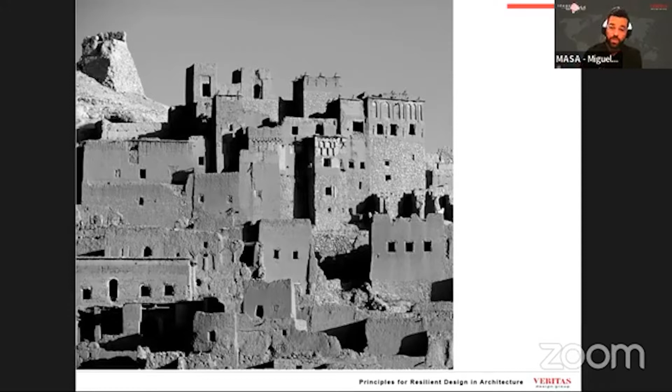This means that architecture has always responded to the environment and to the context or conditions of a certain place. Locally in Malaysia, the longhouse, or in Indonesia, the Batak house, are examples of how architecture has traditionally adapted to the specific environmental conditions or demands of a place and the available technology to generate its own constructive systems and typologies. This means architecture has always, not only recently, tried to respond to the environmental and contextual conditions of a particular place.

Likewise, at Veritas, we did not start doing sustainable or resilient design in our buildings only recently, or only a few years ago, when these keywords became popular or usual in the industry or society. Indeed, the preservation or restoration of the environment through what we do, through the buildings that we do, has been a core part of our business and our practice since Veritas started in 1987.

And I will show you today, or prove to you today, how environment is actually one of the key core values of the 5 Veritas core values.

In 2004, we created our Veritas Fund for Excellence, through which we dedicate a certain portion of our annual profit to initiatives that further innovation, design excellence, and social responsibility towards the built environment.

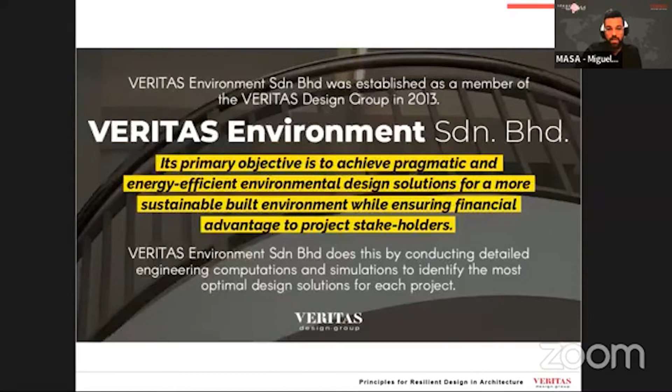More recently, after having done more than 35 certified green buildings worldwide, we understood we were ready to launch our own green assessment tool, our Veritas Green Check, that allows us from very early stages in the design to understand how our buildings can respond better to environmental demands and how they can be sustainable, and also to help our clients focus on the areas that are key when they want to apply to any of the conventional green rating certificates or tools in the industry.

By the way, we are in the process of getting our Veritas Green Check endorsed, so hopefully soon this will be one of the usual industry tools to certify our green buildings in the country.

Two years ago, when the current health concern started — I will not mention those words throughout my entire talk, I have banned myself from saying those — we understood it was important to go beyond sustainability towards a more complex concept that talks about our preparedness, our buildings and our cities, societies, and people, to face another set of challenges or crises and to bounce back, to recover quickly and to resist.

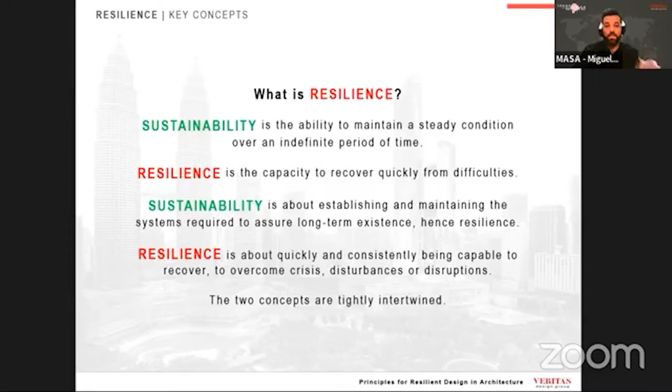So sustainability is about establishing and maintaining the systems required to assure long-term sustainability or existence, while resilience is about quickly and consistently being capable to recover, to overcome crises, disturbances, or disruptions.

So what does resilience entail when it comes to building design? To design a building with resilience means to start the design process by assuming the natural or man-caused situations that may distress the normal use and operation of a building, by challenging its integrity, or by endangering or causing disruption or disturbances to its occupants. So resilient design is always local or locally specific, as the environment plays a critical role in determining the factors that make a building resilient or not.

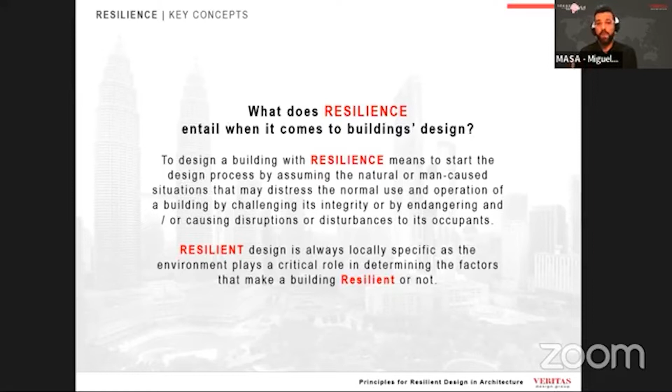We have studied the aspects that help us determine whether a building is resilient or not, or to what degree a building may be considered resilient. And we have categorized those notions into 7 principles for resilient design in architecture.

Redundancy, which is the integration of duplicative systems and structures. Adaptability and flexibility, which is the ability to respond to the local context and to accommodate changes to environmental and social conditions and needs.

Interdependency, which is the ability to offer a holistic approach to not only the building, but the site, the city, and the community. Regenerative and restorative, that talks about the incorporation of systems that reduce the demand on fossil energy sources and infrastructure systems while reducing the carbon footprint of the building.

Durability, which is the ability to offer long-lasting, long-term value to our buildings. Value, the capacity to provide social, environmental, and economic benefits to the surrounding community. Cultural responsiveness, the ability to reflect the local culture and to create long-lasting memories for the community.

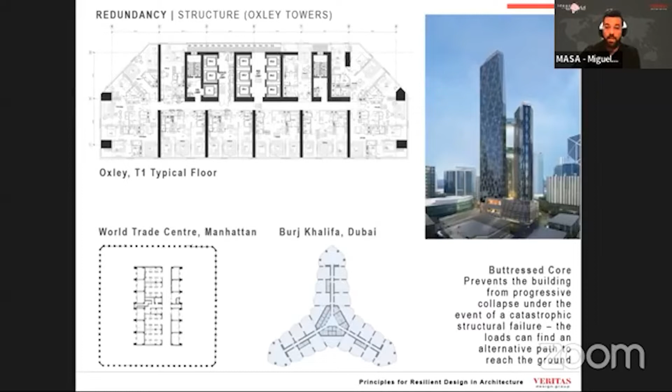The buttressed core was used in the Burj Khalifa in Dubai, which you can see as well in the slide. It's the tallest building in the world, but also in our Oxley Towers, a 345 meter height super tall building in KLCC.

There are also mechanical and electrical systems that can be rethought, reconfigured, or just relocated to make our buildings more resilient, to improve our buildings' readiness to face challenges and to bounce back after a crisis. Some of these systems are present as well in our Oxley Towers project.

For example, there are backup transformers. This means that all components have transformers that can take over in case of malfunction of the main transformer. All the essential distribution boards are backed up by diesel gensets. All the chillers and pump sets are also backed up by additional standby pump sets. All these backup generators and pumps, usually located at the basement, what renders them unusable in case of flood, may be relocated to the podium.

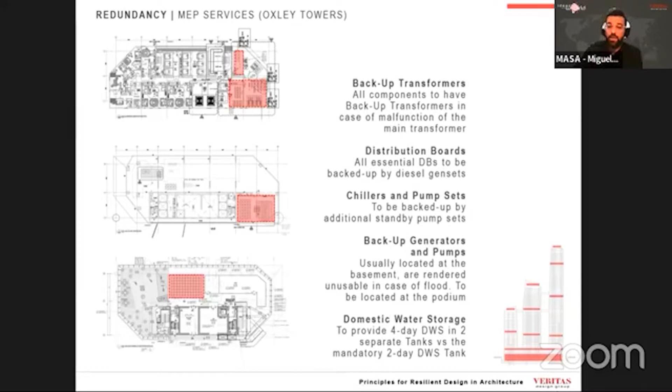The domestic water storage tanks, instead of providing the usual 2-day water storage, may be provided for 4 days in 2 separate tanks. So in case that one is rendered unusable due to maintenance or the water is corrupted for any reason, we can still rely on another one to ensure that there is no water disruption.

Also, redundancy in the security systems can contribute to making our buildings more resilient and ready to face any security threat or breach. We talk about fire control centers and security control rooms distributed throughout the building, but also about other security features or devices that can be incorporated throughout the building to prevent different security hazards, such as boom gates or vehicle scanners, access cards, CCTV, turnstiles.

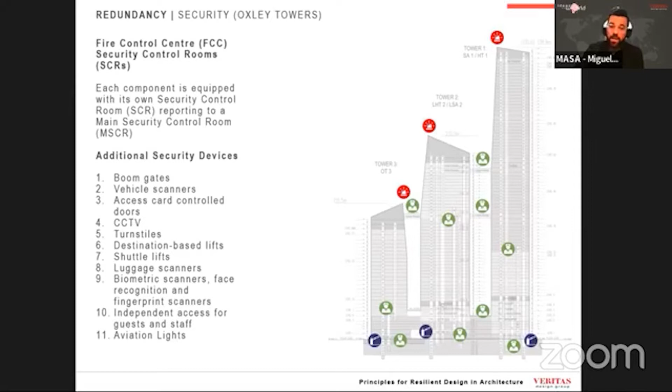But you may consider as well other features commonly used, like destination-based lifts or shuttle lifts that force visitors to pass by 2 tiers of security, 2 levels of lobby, as measures that enhance the security in our public buildings, especially those of very large scale. Luggage scanners, biometric scanners, and even independent accesses for staff and for visitors with different sets of security measures are considered as redundancy in the security features of a building.

As well, when we talk about tall or very tall buildings, in this case we refer to buildings that must fight the fire internally. This means that these tall buildings require, in general, far more robust considerations of both its passive and active firefighting strategies.

Some of the easier or more immediate design passive considerations that we can impose on our tall buildings to make them more resilient are the provision of wider staircases that overcome the counterflow and congestion due to slow evacuation and fatigue, and the use of performance-based fire engineering.

For critical areas such as atriums or large public spaces at high floors, sky decks, sky restaurants, etc., the performance of the fire, the smoke, or the people must be simulated to anticipate and design better our buildings to behave in case of fire.

The use of class 0, non-flammable, and class A1, non-combustible, fire-resistant materials to limit the fire load in our buildings, and of course the regular maintenance and testing of the fire protection systems.

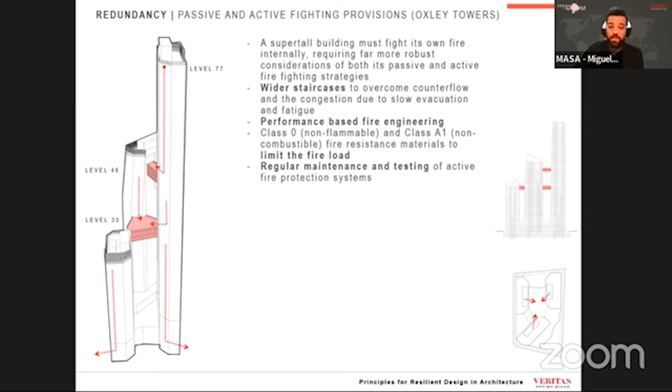Talking still about fire evacuation or fire safety in buildings, especially again in tall or very tall buildings, we must consider as well, or anticipate throughout the design process, how the evacuation of our buildings will be.

In general, there are 3 evacuation strategies. Total evacuation is the traditional strategy—everybody gets out from the building—but this may be impractical for tall buildings or for very tall buildings.

As the simulations show, it takes more than 3 hours to fully evacuate a very tall or super tall building due to the high occupancy, people getting fatigued or tired, or people with disabilities who may block the staircases, and of course the counterflow of the firemen going up.

In these cases, when total evacuation is not possible, we should consider a phased evacuation. This means there is a zoned alarm and public address system that allows a phased evacuation of certain components, those that are in danger.

We can also, as we do in our project in Oxley, use sky bridges to cross from one tower that may be on fire to the adjacent tower, so people can use the normal lifts to evacuate the building through the adjacent tower, or use refuge floors where occupants can safely wait until being rescued.

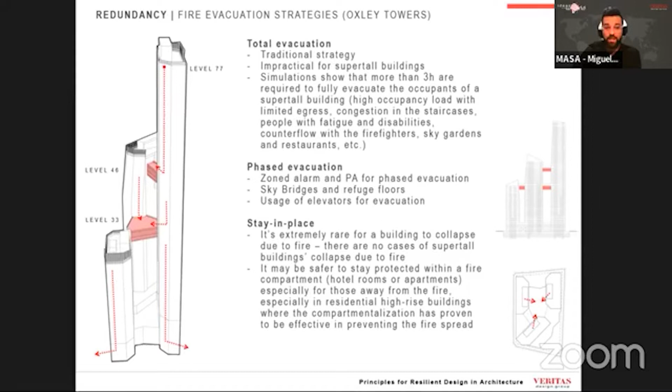Adaptability and flexibility is the second of these resilient design principles, and talks about the building's ability to respond to the local context and to accommodate changing environmental and social conditions and needs. It also talks about the ability of a building to be retrofitted or repurposed in the future.

There are two factors related to the floor plate design that are key. First, efficiency: ensuring the floor plate has a certain size that assures a commercially viable efficiency, ideally around 80% of the floor plate. Second, the depth of the floor plate should be such that daylight can penetrate to the bottom of the floor plate.

On the screen are a couple of examples of buildings by us, VERITAS: Menara Prestige, an office building in KLCC, and also our Oxley Towers, a mixed development in KLCC.

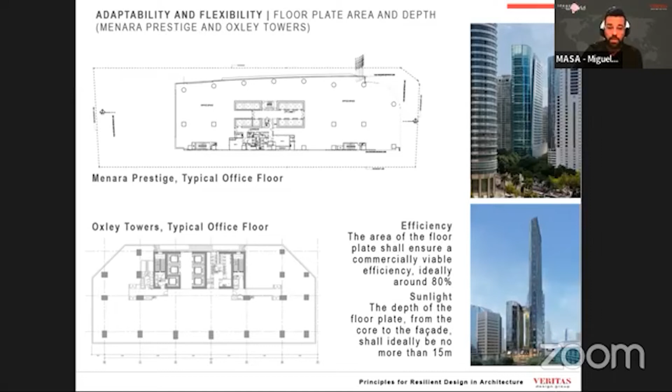Talking about the ability of a building to be retrofitted, the choice of structural systems is also key. This slide summarizes the two main systems commonly used for RC structures: PT, post-tension slab and beams, or conventional RC reinforced concrete structures. While PT post-tension is very popular, as it can be lighter, faster, and cheaper than conventional RC slabs, especially for large-scale repetitive buildings, PT slabs are less flexible in the future if large or multiple openings for services need to be added to the floor plate.

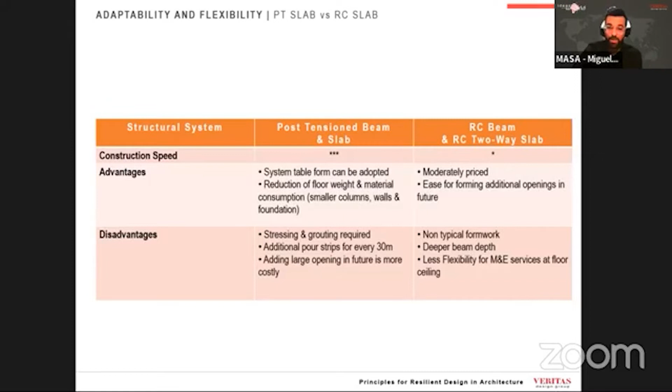For example, if we were to repurpose an office building into a hotel or apartments. As the talk will be available on YouTube, you can refer later to this table in more detail. But I'll give an example using our Oxley Towers. Tower 1 has residences and hotel guest rooms, and Tower 3 has offices. Both floor plates have a similar size and geometry.

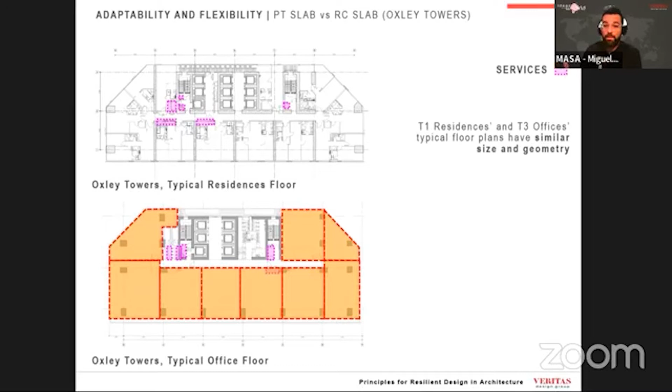The provision of RC versus PT slab for Tower 3, and columns instead of shear walls, despite the initial higher cost and perhaps slightly longer construction time, may offer the possibility to easily retrofit the building in the future if there was no demand for office space. Likewise, the provision of RC slab versus PT slab at podium car park floors may offer the possibility to retrofit the car park floors in the future when the public transport network and usage has improved, and cars become less relevant or less present in the city.

Another way of making our buildings resilient by making them more adaptable and flexible is the incorporation of aircon farms, where individual compressors in individual aircon ledges can be grouped together in a common area. This approach has several advantages.

You can see the aircon farm in blue in the slide. First, the grouped compressors are placed facing the less favorable views, minimizing noise to habitable areas, and grouping them allows us to create a sleeker, cleaner facade expression, especially when we use curtain wall. It also offers easier maintenance from common areas rather than accessing each individual unit.

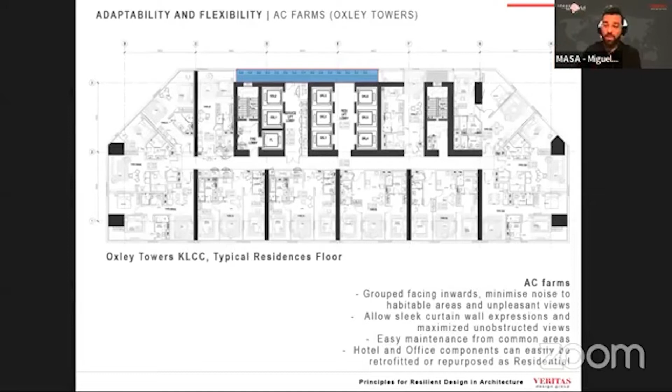But very importantly, when we have this facility, hotel and office blocks can very easily be retrofitted or repurposed as residential use when there is no demand for hotels or office space. This is another example of use of aircon farms.

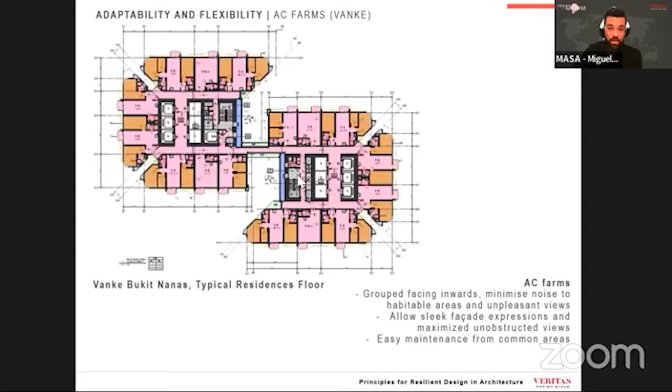This is our Vanke Towers in Bukit Nanas. You can see the aircon farms in blue at the center of the building.

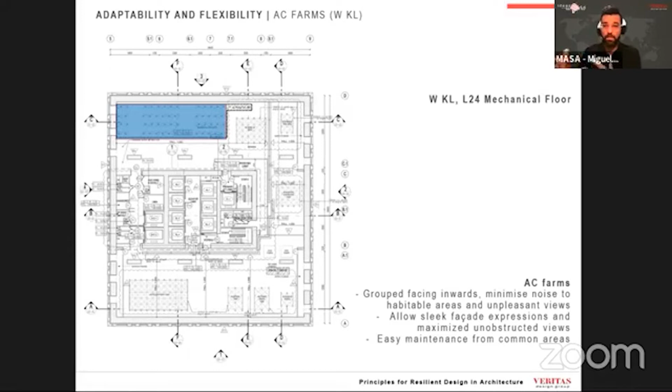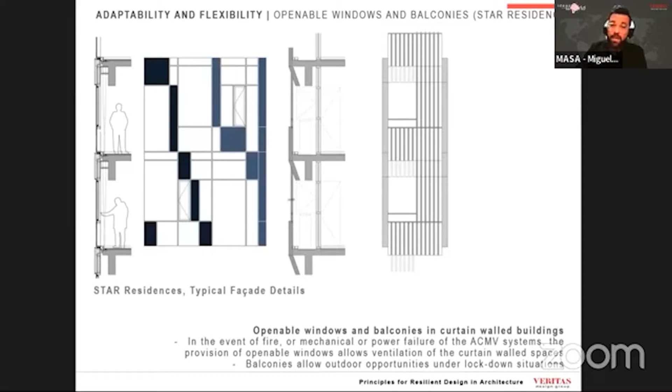But also, we have discovered and experienced ourselves through the last two years that balconies and outdoor opportunities under lockdown situations are critical, and this is unusual to be provided in tall buildings with curtain wall. So Star Residences is an example of how this can be integrated into the facade design successfully, as you can see in these images.

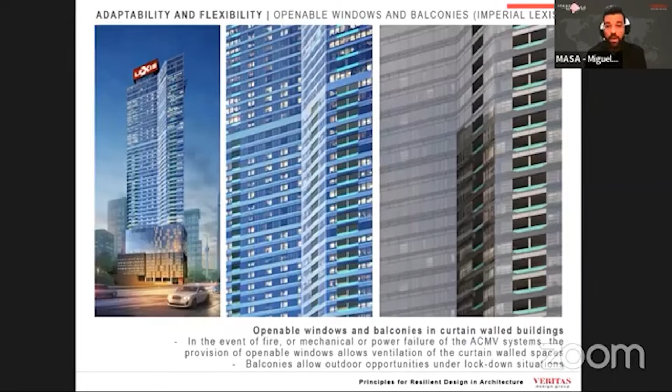Imperial Lexis, also in KLCC, is another example of how windows, aircon ledges, and outdoor spaces can be provided in a curtain wall building without disrupting its sleek expression. In this case, every residential unit is provided with a small private swimming pool and an outdoor deck. Here you can see some visuals of how this building will look by this year or early next year when it's completed.

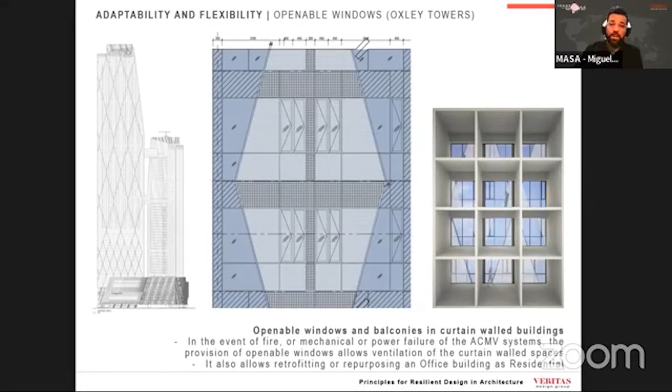And a last example, Oxley Towers, again, of how we can incorporate openable windows in a curtain wall building as part of the facade pattern, as part of the facade composition.

Interdependency, which is the third principle for resilient design in architecture, talks about how buildings can offer a holistic approach, not only to the site, but to the city and to the community.

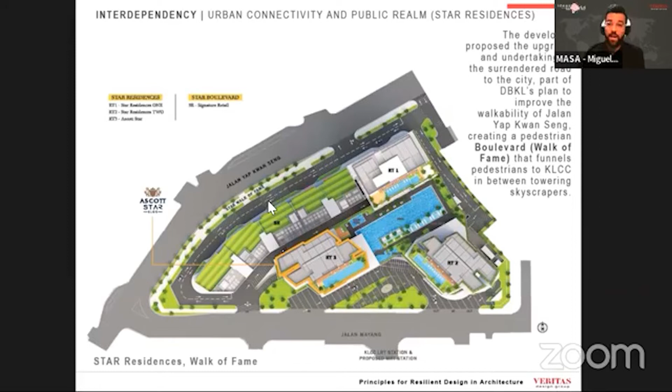In Star Residences, the developer was generous enough to propose the upgrade and the undertaking of the land surrendered to DBKL, as part of DBKL's plan to improve the walkability of Jalan Yap Kwan Seng. We took this opportunity to create a pedestrian boulevard along the northwest edge of the building, along the retail podium, that funnels pedestrians to KLCC, and we call it Walk of Fame. The boulevard along the retail podium sets a precedent for future interventions along the street, which will eventually, once the entire street front has been completed, create a continuous pedestrian pathway, and certainly will improve the walkability of this part of the city.

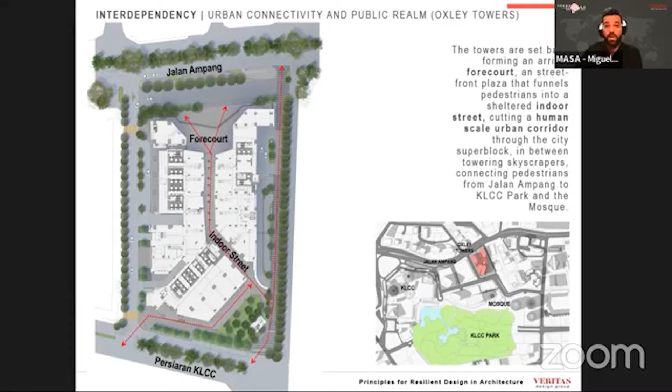Oxley Towers is another example of how our buildings can contribute to creating more resilient cities by improving walkability. In this case, the towers are set back, forming an arrival forecourt or plaza that funnels pedestrians through an indoor sheltered street, cutting an urban corridor through the city superblock and connecting pedestrians from Jalan Ampang to KLCC and the mosque. The arrival plaza before the retail facing Jalan Ampang will eventually, once the entire street front has been completed, create a continuous pathway and will also improve walkability along Jalan Ampang. Through this indoor street, this urban corridor, we allow pedestrians to walk under shelter from Jalan Ampang to the pocket park at the rear of the building and to KLCC and the mosque.

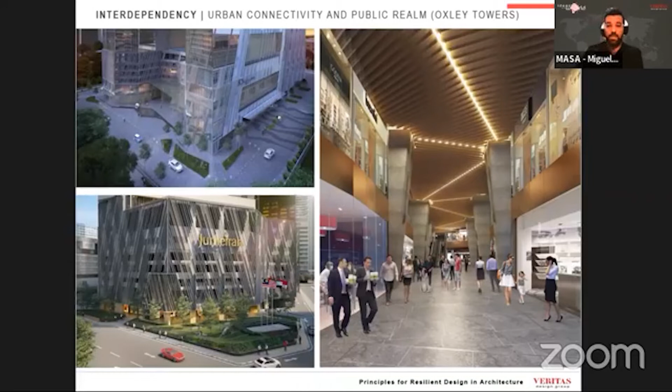On another hand, mixed-use developments are by default resilient. I'll explain why. For example, in Oxley, there are different uses or functions of components: residences, offices, hotels, and retail. All of these uses are independent, but can also support and reinforce each other, creating a city within a city. This reduces the need for commuting and the associated transport pollution, or the time we spend doing so, but also allows us to centralize and streamline the security of the building.

On another hand, it allows us to design buildings and systems which are alive 24/7, versus the regular daily use cycles of single-use buildings that are empty or non-operational at certain times of the day. In this case, the mechanical and electrical services of the building can be designed and streamlined to serve the different needs of the building when certain components are operating concurrently or at alternate times.

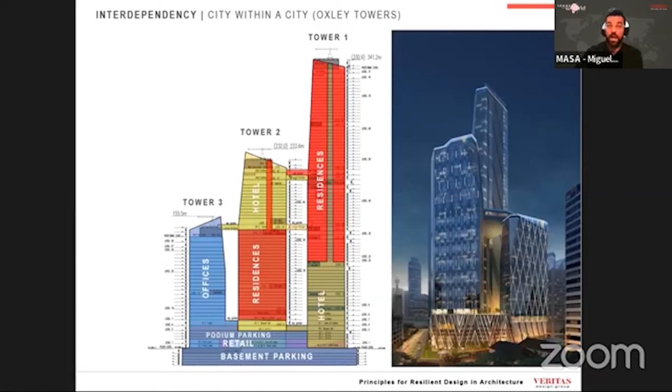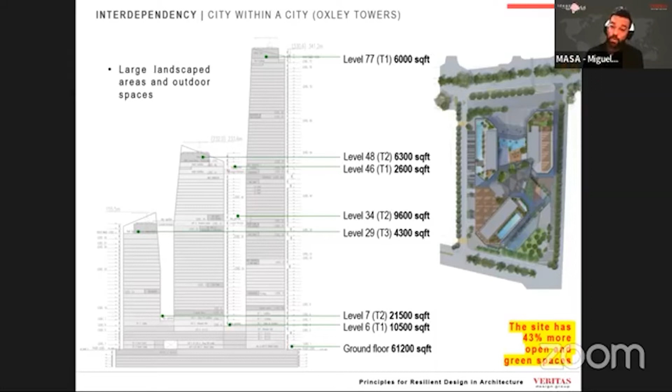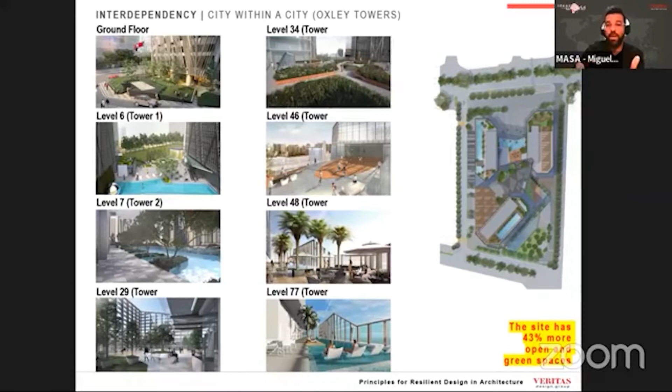Within the building as well, the large provision of landscaped areas and outdoor spaces, not only at the ground floor, but at the podium, sky decks, and sky bridges, provides building occupants with multiple outdoor opportunities within the compound itself. Indeed, considering the building's footprint, there will be 43% more green areas once the building is completed than before.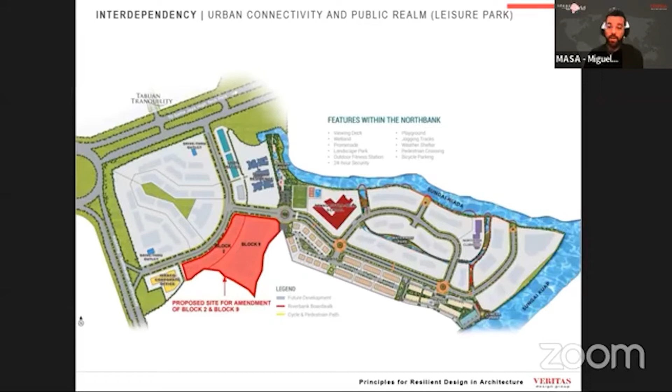This is another example of a complex, large-scale mixed development for one of our clients. We were commissioned in 2019 to develop the site marked in red as a business and leisure park, as a mixed-use development. In our proposal, there is a long spine block that accommodates most of the residential units, together with a shorter residential block that you can see at the rear.

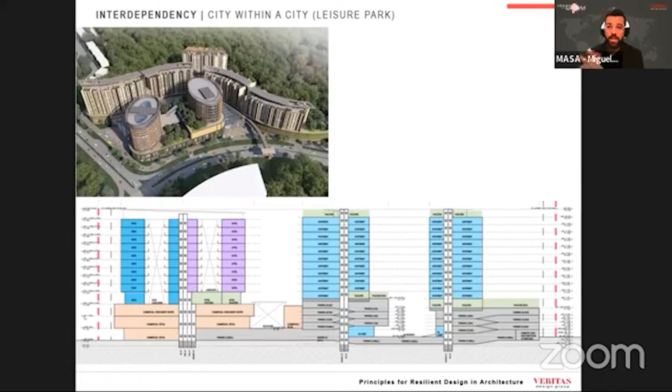And at the front, there is a 3-story retail mall with two elliptical blocks sitting on top. The one on the left accommodates a boutique hotel and some SOHO units, and the one in the center is dedicated to offices.

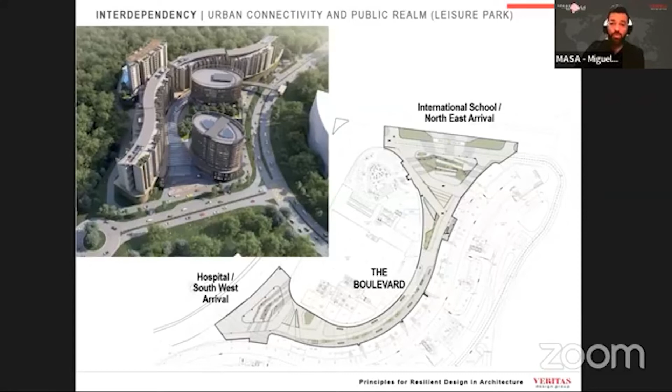But besides the attractive design of this overall park, the most important gesture that our proposal introduces is a sheltered, semi-outdoor boulevard that at the same time creates a large communal recreational space, plenty of trees, water features, canopies, al fresco eateries, not only for the community living or working there, but also for those who visit the building. But more importantly, this boulevard connects two very important nodes in the master plan: the international school at the north and the hospital at the southwest.

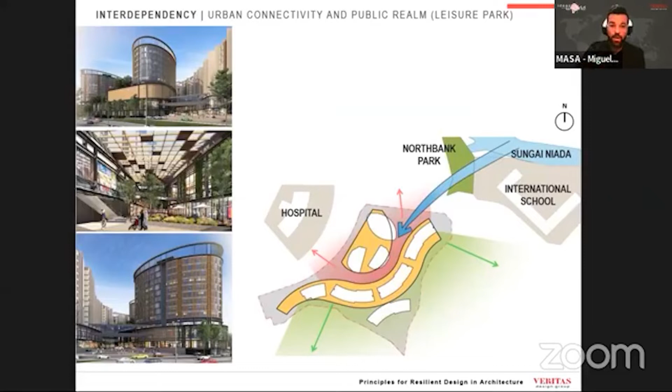Indeed, in 2020, this client invited us to propose another two large areas for this master plan, and we then understood the key role that our first proposal, the business and leisure park, and this boulevard was playing, not only in connecting the hospital and the school, but also in connecting the whole residential district at the east with the entire commercial district on the west, and furthermore with the future, or hopefully future, LRT station passing by to the west.

Through this boulevard, we catalyzed a key role in this master plan that focuses on urban pedestrian connectivity through a pleasant, user-friendly network of green streets, boulevards, and plazas.

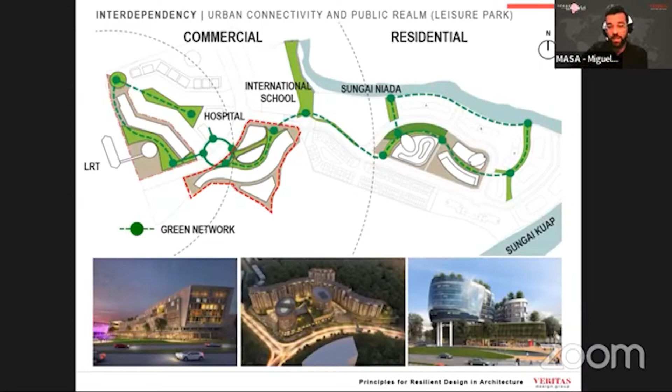The green focus extends to the architectural proposal, and indeed every building and almost every piece of roof is colonized by green, by water, creating plenty of outdoor areas where every member of the community, not only those living or working there, but anyone nearby or anyone who wants to visit this master plan, can find their own space to be alone or to be together.

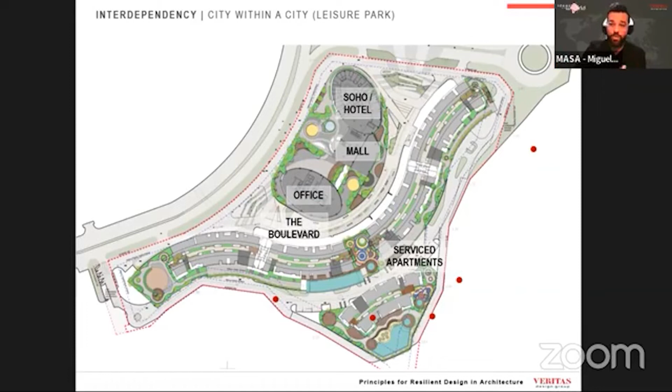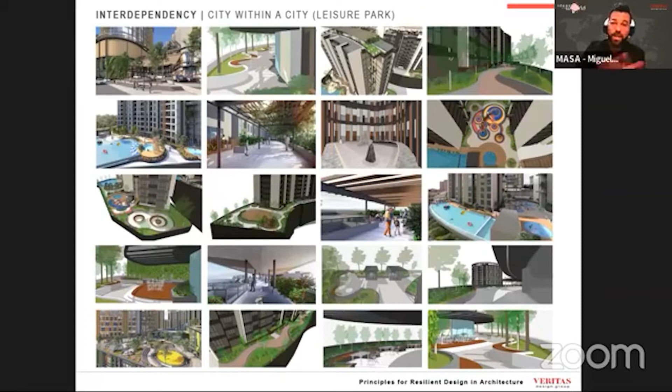And these are some of the landscape areas. Indeed, this building certainly proposes a very extensive program of outdoor and green areas, not only for the community living there, but for the surrounding buildings.

Continuing with some of our buildings offering a very strong responsible urban approach that creates and improves the public realm, we have the Selangor State Development Corporation headquarters, or the PKNS headquarters in Shah Alam.

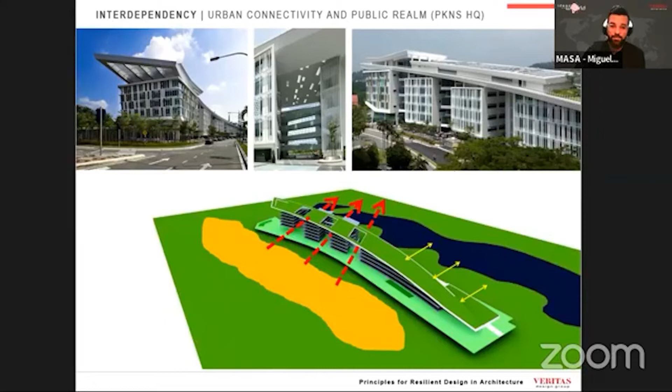As mentioned at the beginning, Veritas has not done sustainable and resilient buildings only recently. Indeed, many of these notions and values are strong and visible in some of our early buildings.

For example, the Ministry of Natural Resources and Environment in Putrajaya. Some of these values and features that are visible and present in these buildings have proven how innovative these buildings were indeed at the time they were proposed.

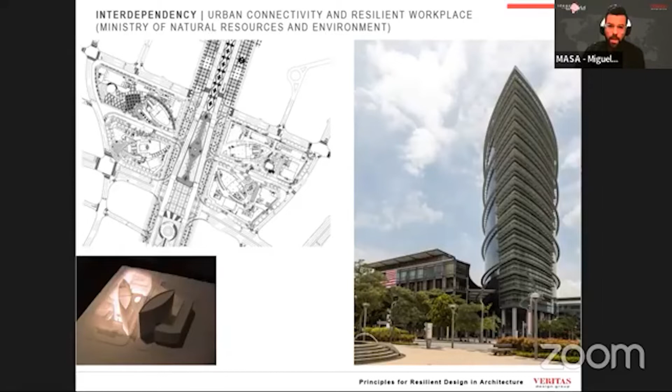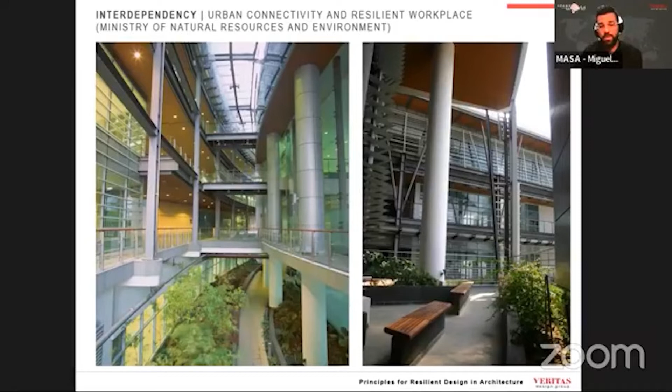At the ground floor, indoor streets allow the public to walk through the buildings, creating a pedestrian-friendly city as part of a larger master plan that we did within the area. And also within the building, sky gardens allow people to be in touch with nature, even at the workplace.

The Digi headquarters is another project that anticipated the importance of sustainable and resilient workplaces. This is a pioneering paperless office in Malaysia, where we carve a large central atrium that shelters the occupants from the outdoors and allows the whole community to come together.

This atrium is a versatile, multi-function space that serves both the daily needs of a gathering place, but also for larger corporate events. At the end of the linear atrium that cuts across the entire building and is surrounded by a hill, we propose this outdoor space around a water body for colleagues and also for social or corporate events.

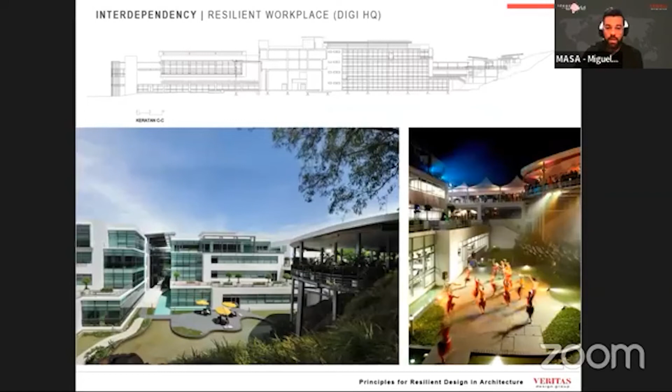More recently, we completed the AirAsia headquarters in KLIA2, in this case with an aesthetic inspired by aviation geometries. Indeed, you feel that you are walking under the belly of a large jumbo jet.

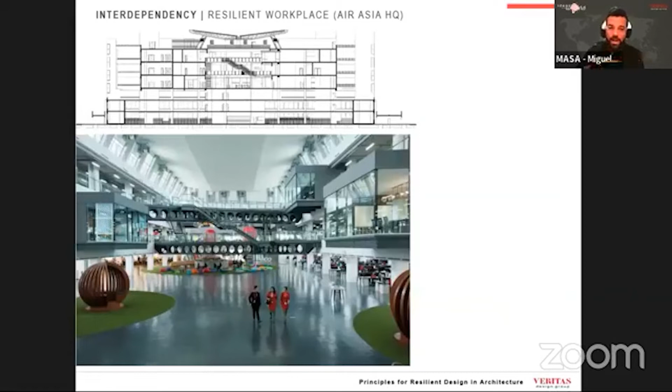We created another large central atrium sheltered from outdoors to allow the entire and very large AirAsia community to come together for their daily activities or for their corporate events.

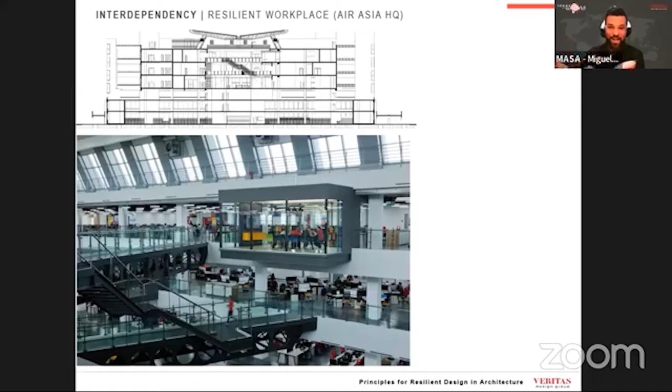Within the atrium, the steel structure appears to give shape to the wings of a plane, and even the air traffic control tower makes an appearance in the atrium in the form of a meeting room.

But also the roof became unexpectedly a social space. And indeed, a year after we completed the building, Tony Fernandes called us to revisit the roof and to make a landscape proposal for it, which you can see in the before and after pictures.

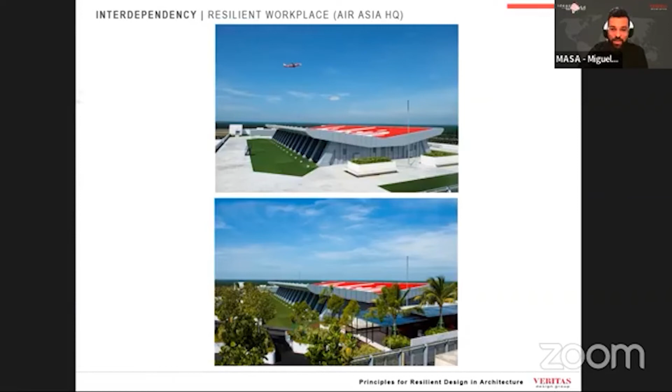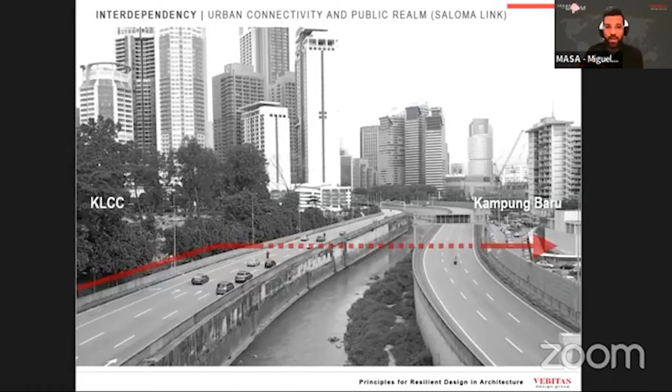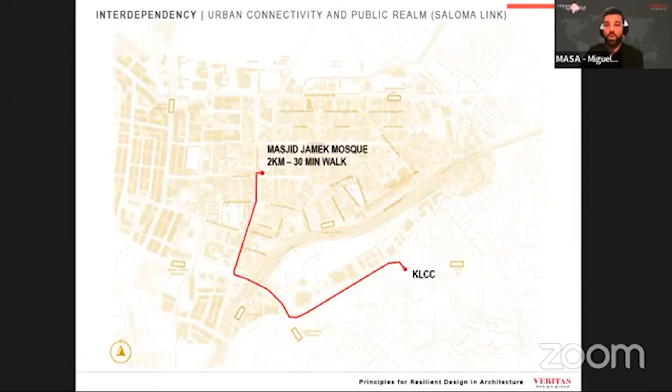This is a picture that keeps striking and inspiring me every time I see it. The Klang River and the 6-lane highway created a physical disconnection between Kampung Baru and KLCC. Despite being adjacent, there was very limited infrastructure providing direct pedestrian access between the two districts. Saloma Link, as a catalyzer for a much larger urban regeneration program, tried to address this by shortening the former 30-minute walk from Masjid Jamek to KLCC to just 15 minutes, or 10 minutes from the Kampung Baru LRT station to KLCC.

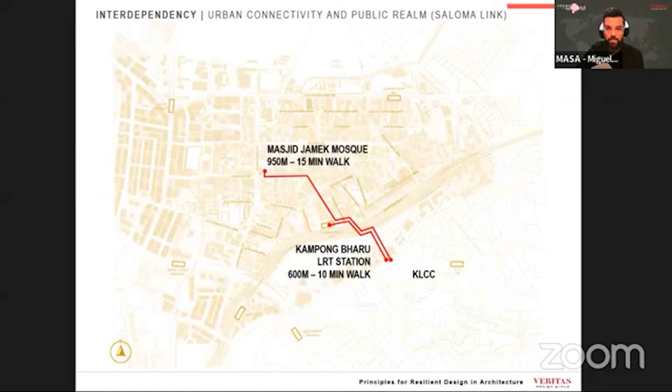The bridge opened up new opportunities for users and encourages more walkability in the city. It also allows local economic activities to flourish and contributes to a vibrant urban setting. More than just a bridge, Saloma Link is part of an effort to encourage pedestrian and cycling mobility and to promote sustainable urban design, with better landscape, street furniture and lighting, envisioning the future development of Kampong Baru.

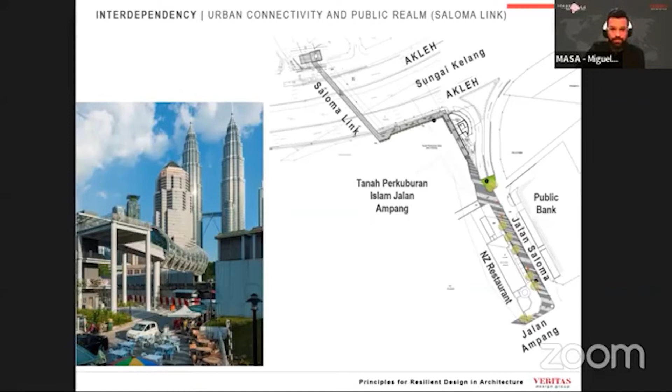The fourth principle for resilient design in architecture is making our buildings restorative and regenerative. This means creating highly engineered buildings that incorporate systems reducing demand on fossil energy and infrastructure while reducing the carbon footprint.

In just a decade, we have completed more than 35 green rated buildings globally, up to platinum level. Indeed, I think we are the Malaysian practice that has done the most green certified projects. I'll show you some of them briefly and explain key achievements and features these buildings incorporate.

We've already spoken about Menara Binjai and its pioneering green certification, pocket gardens and roof garden. Within Menara Binjai we also find the British High Commission, which is the only LEED certified embassy in Malaysia and one of the earliest LEED certified workplaces in the country.

Menara Etica uses only 40% of the energy used by a similar office building and reduces carbon emissions by 55%. So it emits only 45% of the carbon emissions that a normal office building of this size would produce.

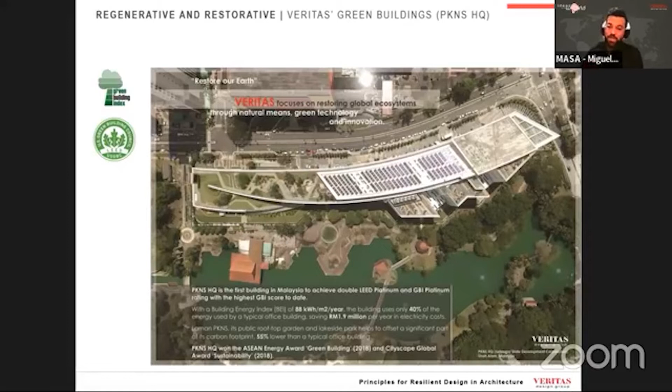PKNS, which we've also spoken about, saves almost 2 million ringgit a year in electricity bills. It uses 40% of the energy used by a typical office building and emits only 45% of the carbon emissions produced by a typical office building of this size.

The International School of Kuala Lumpur, or ISKL, is the lowest carbon footprint educational building ever designed in Malaysia. It's a highly engineered building that uses the latest technology as part of the learning experience for students, subconsciously educating children on responsible use of energy and spaces through their education and daily lives.

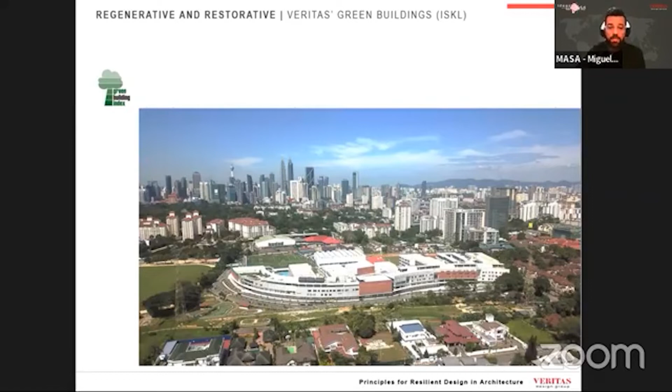ISKL uses only 56% of the energy and 51% of the water used by a similar international school, and saves 2.2 million ringgit a year in electricity bills. It also produces only 56% of the carbon emissions compared to a similar international school.

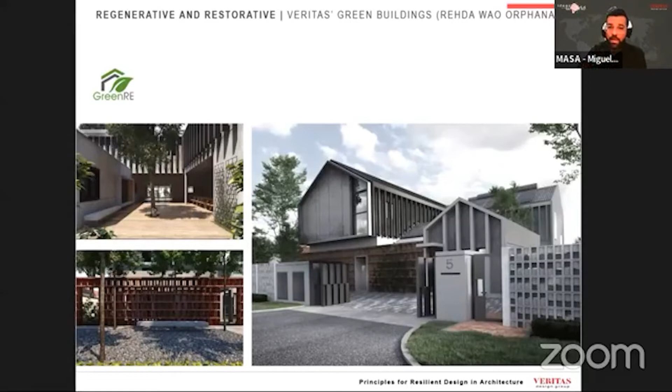Two last projects: the REHDA Women's Aid Organisation Orphanage, just completed, has achieved the highest platinum green rating ever in Malaysia for any building. And the Petronas Leadership Center, commissioned by Petronas to create their future leadership center as a resilient, self-sustained and future-proof building. The building settings become part of the learning experience, subconsciously promoting among future leaders of the company a more responsible use of spaces and energy.

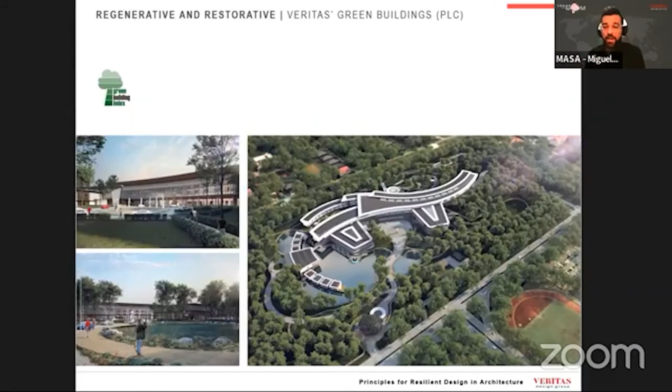There's also the man-made lake that cools the building and serves as part of the rainwater harvesting and management system. Our Oxley Towers, when completed, will have all its components—hotels, offices, retail and service apartments—green certified.

And lastly, under this chapter: sustainability and resilience in our winning proposal.

We got the third position for the new capital of Indonesia in Kalimantan, where essential services and the use of the latest technology are put in place to reduce the city's waste and energy consumption, but also, very importantly, to manage flood and climate change and the expected water level rise in the years to come. This topic alone is probably worth a talk on its own, so I will not elaborate today.

The fifth principle for resilient design in architecture is durability, which talks about the ability of buildings to offer long-lasting, long-term value to their owners. Building structures are generally designed for a 50 year lifespan, and with regular maintenance can last 100 years and longer, while mechanical and electrical systems are designed to last 15 to 30 years depending on the service, and with regular maintenance can last up to 50 years.

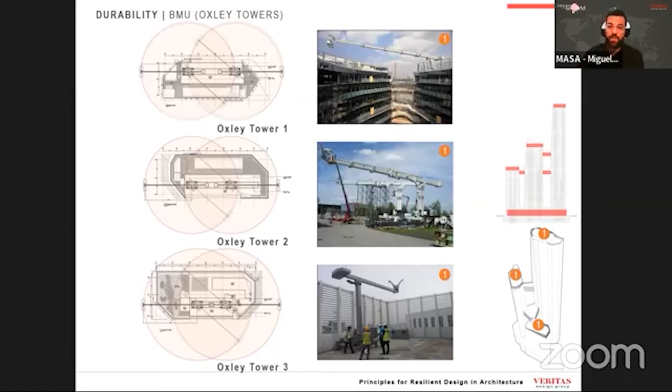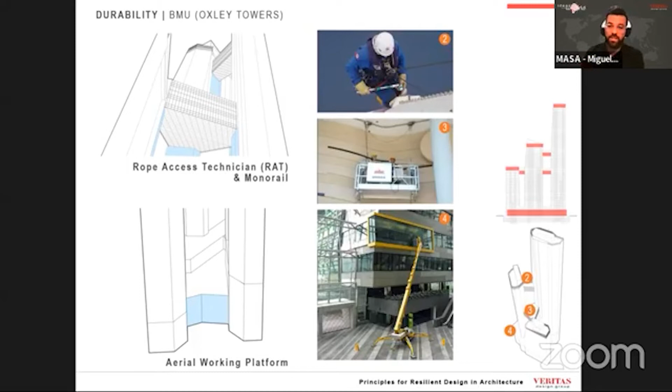As one example, I share with you the ample display of building maintenance units, or BMU, that we use in Oxley Towers, from telescopic arm gondolas that reach the facade and the tallest crowns of the building, to rope access to clean the bridge facades, monorail cradles to clean the underside of the bridges, or aerial working platforms to clean the facade at lower floors. This is a whole display of systems ensuring access, maintenance, cleanliness, watertightness, and safety for all the vertical and horizontal surfaces and members of this very complex building.

Resilient buildings are also those which are magnets for financial activities, or urban catalysts for the development, regeneration, or growth of a certain area of the city, providing social, environmental, or economic benefits to the surrounding community. Buildings that create value for the neighborhood and the properties around them, often more than for the building itself, or simply those buildings which symbolize landmarks that guide users, citizens, or visitors in the city.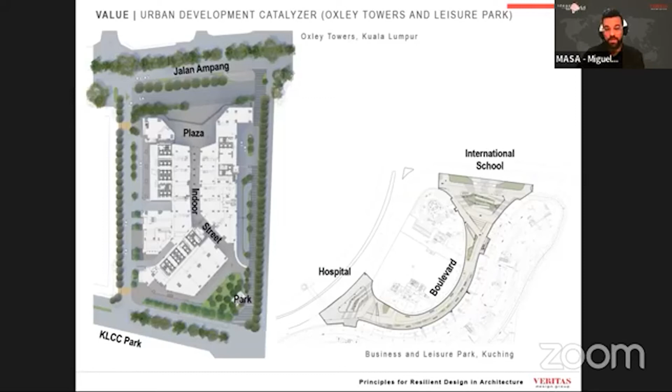In this regard, we have spoken about urban corridors throughout buildings—Oxley, where we created a sheltered indoor street connecting Jalan Ampang, KLCC Park, and the mosque through this city mega block, or the business and leisure park, where we proposed a semi-outdoor boulevard that not only connects neighboring buildings within the master plan, but plays a pivotal role in creating a whole pedestrian network of green spaces.

Star Residences, where the boulevard along the retail podium improves walkability in this part of the city, or Saloma Link, connecting KLCC and Kampong Baru, encouraging pedestrian and cycling mobility and attracting local economic activities to flourish, contributing to a more vibrant urban setting.

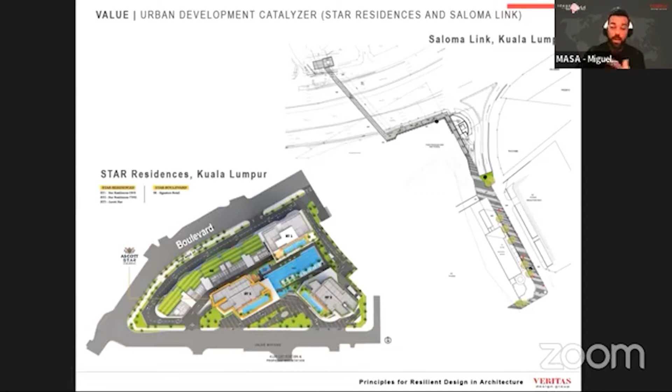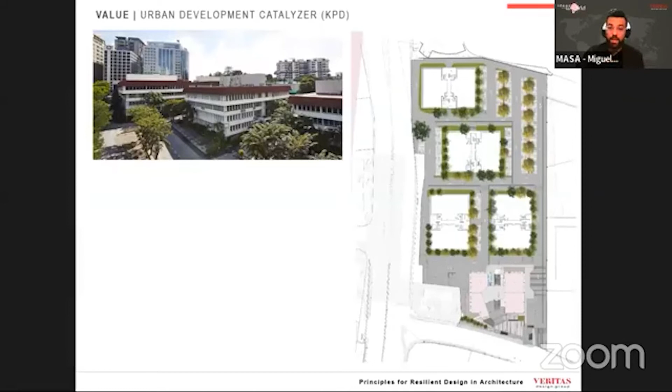More recently, just a few months ago, we completed a very interesting project where we were called to repurpose one of the blocks within an office complex designed in Damansara in the 70s, late modern architecture, from office to retail. You probably know it—KPD, Kompleks Pejabat Damansara.

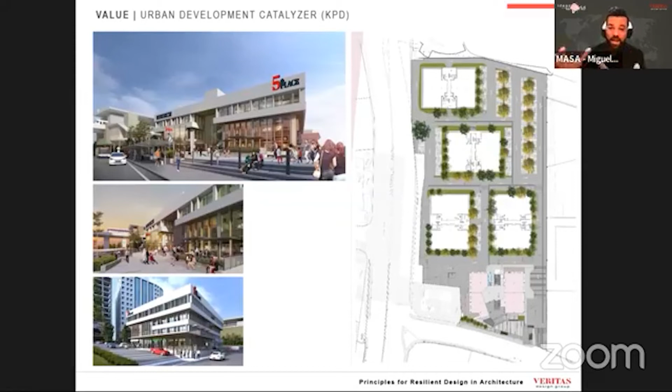Our proposal consisted of upgrading and modernizing the block closer to the main street, Jalan Dungun, into a contemporary, cozy boutique retail building through a series of small, almost surgical interventions, both inside and outside the building, by creating an urban plaza before the building that has already attracted social activities and gathering, becoming an address and meeting point in the area, and by uplifting the overall landscape within the compound.

And the last principle for resilient design in architecture is cultural responsiveness, which talks about a building's ability to reflect the local culture and create long-lasting memories for the community. Some of our projects appear recurrently under all these principles for resilient design.

In this case, the facade of Oxley Towers was inspired by traditional Songket patterns. Under this weaving concept, local visual and cultural references of arts and crafts—in this case the metallic threads of certain geometrical patterns of Songket—are reinterpreted as facade motifs and technology.

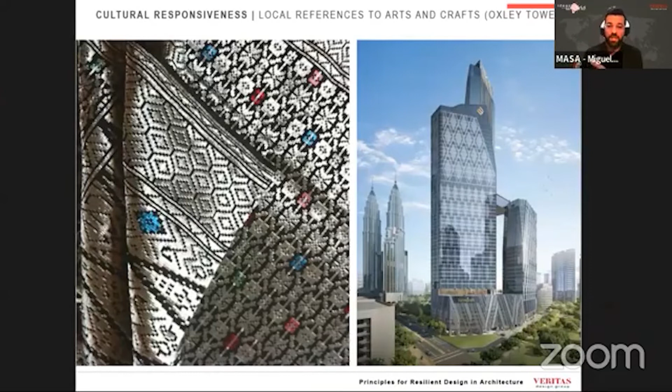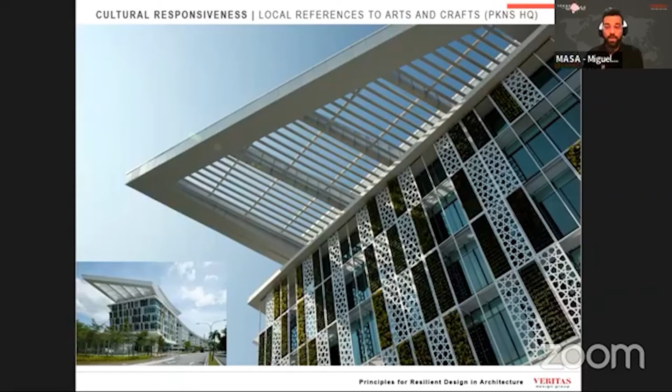Some of the most celebrated Islamic patterns were reinterpreted as contemporary facade screens in our PKNS headquarters.

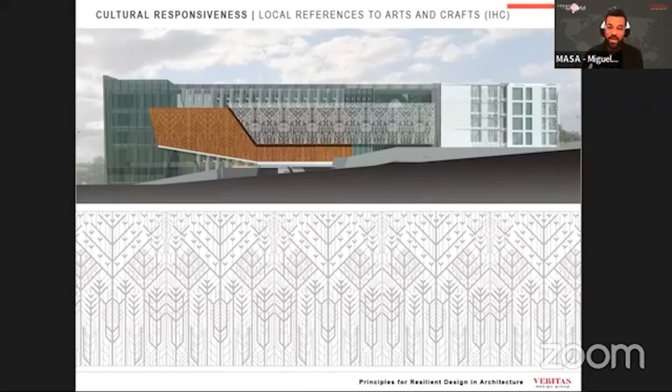More recently, now under design stage, the Tree of Life in our Indian High Commission. The Tree of Life is associated with many Hindu gods and has pivotal importance in Hindu mythology. It's a mythical symbol that illustrates life in all its aspects, but also symbolizes personal development, uniqueness, and individual beauty. In this case, it's used extensively as a facade motif over the auditorium, blind walls, and also as a facade screen at the drop-off and at the residences.

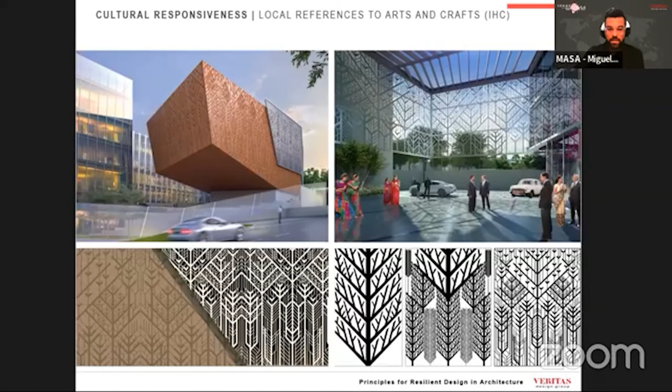Also, the geometry of the famous Indian stepwells is explored and reinterpreted to become the facade of the Chancellery building within the Indian High Commission.

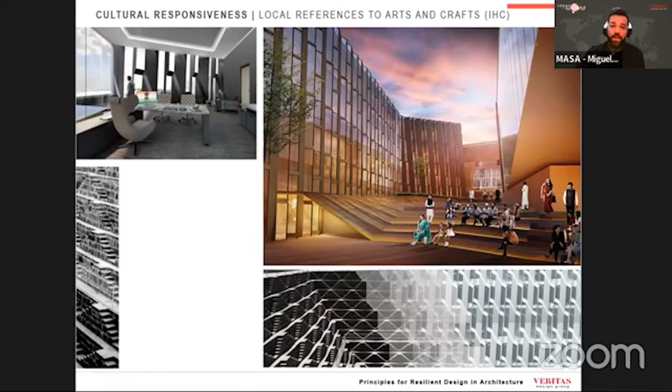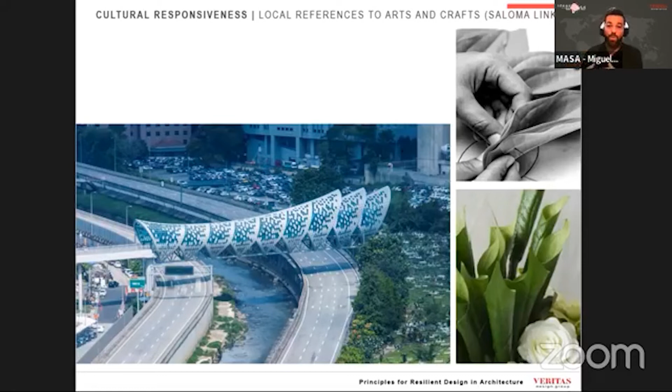Saloma Link appears also under this chapter. The design of this pedestrian bridge was inspired by the Sirih Junjung, an ornament traditionally offered in Malay weddings as a symbol of unity. This concept signified the importance of uniting the two prominent fabrics of the city with the vision of making KL a more environmentally friendly and walkable city.

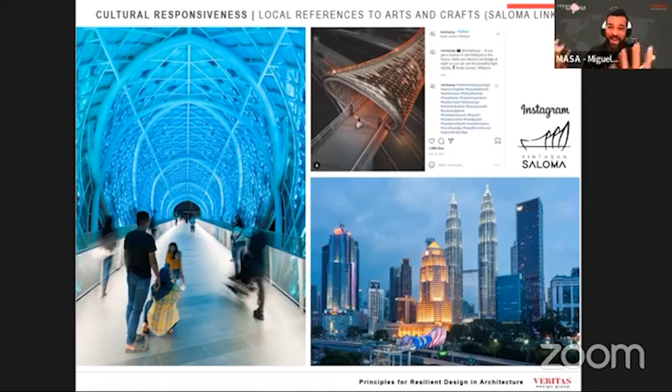During the day, the daylight casts shades and shadows from the bridge, creating a breezy and comfortable, pleasant walk through the bridge. At night, the LED lighting adds colors to the experience, displaying different patterns and seasonal motifs. Since the bridge opened, it has become a new landmark in the city's public realm, attracting people of KL and tourists to spend time here while enjoying beautiful views of KLCC. It has become one of the most photographed places and attractions in the city. I guess all of you have a picture at Saloma Link.

So in summary, we have spoken about these 7 principles for resilient design in architecture. We have studied the aspects and considerations that allow us to determine whether our buildings are resilient or not, under these 7 notions: redundancy, adaptability and flexibility, interdependency, regenerative and restorative, durability, value, and cultural responsiveness. Hopefully, when you revisit the design of any of your buildings or urban proposals, you may ask yourselves whether some or all of these principles are being taken into consideration, or how your design can contribute to creating more sustainable and resilient buildings and cities for all, for the future.